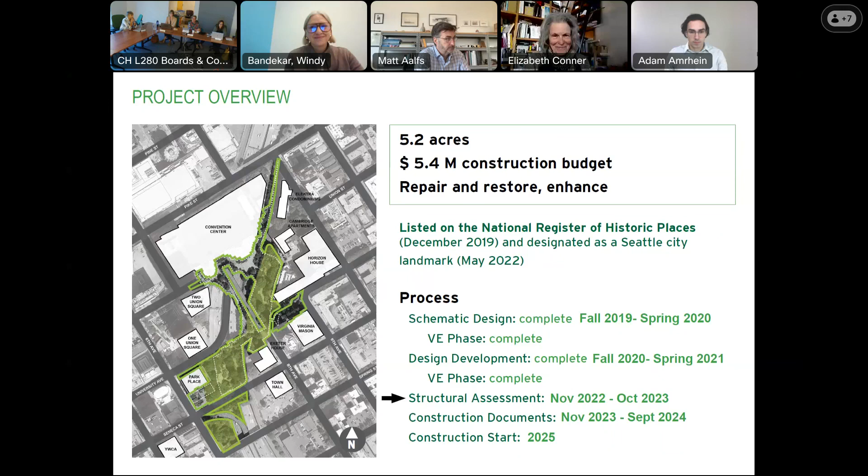The original intent of the project was to make the park more welcoming, bring people back to the park, and restore its reputation as a centerpiece of Seattle's park system and an icon of landscape architecture.

Through the design process, the design team teased out key recommendations to strengthen the park entrances, clarify and promote the park's prime areas, and increase activity throughout the park to attract families and park visitors, providing infrastructure that would support events and activities.

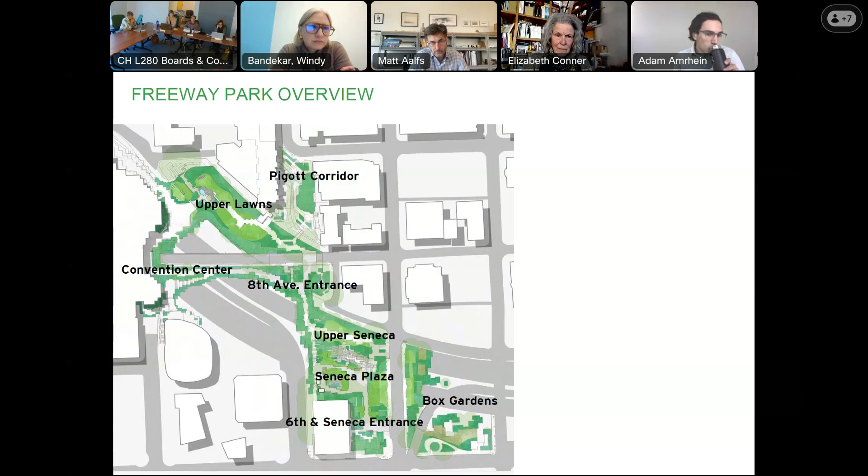So Freeway Park is a complicated system of properties. There's a central spine that is publicly owned, and then the Pigott Corridor, the Convention Center, and a little piece down at the bottom at 6th and Seneca entrance are actually privately owned parcels that act as arms out to the community connecting up to Freeway Park.

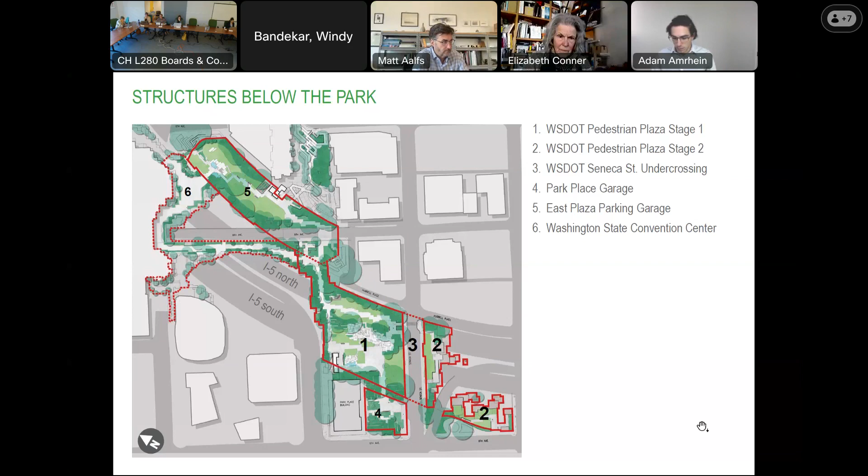Under the park there's a series of structures. Areas 1, 2, and 3 are over the WSDOT lid, which is over I-5. Parcel 4 is above the Park Place garage, under the Park Place building. Area 5 is the City of Seattle East Plaza parking garage, and area 6 is the Washington State Convention Center. So there are a lot of different structures that this park bridges over.

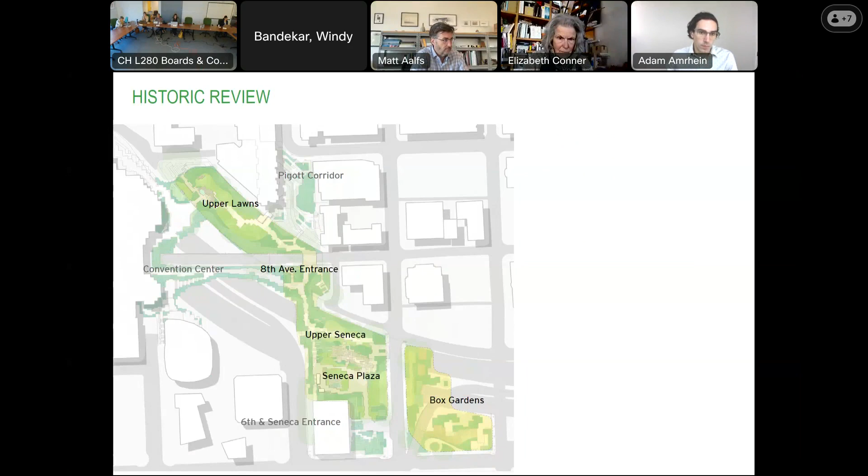Primarily, this central spine is subject to the landmarks designation, so it's also under historic review, and this is where the majority of our improvements are taking place.

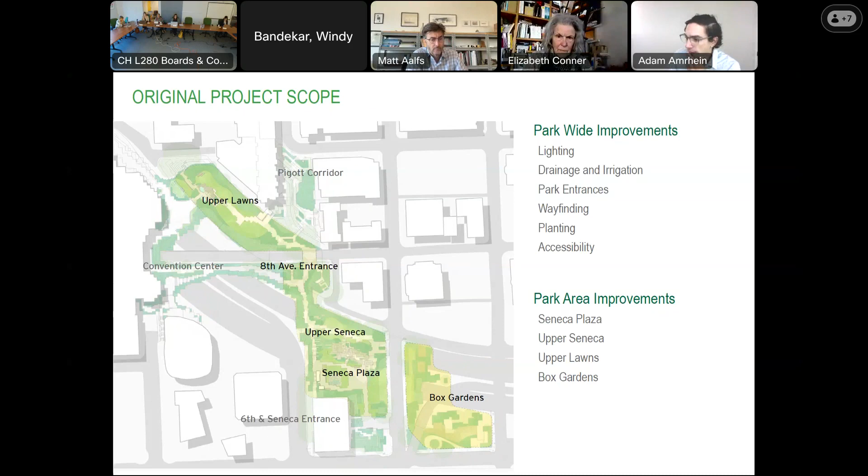The original project scope stretched from the upper lawns all the way down to the box gardens. That original scope came in at $23 million, slightly over our $5.4 million mark, so we have had to tease that back.

With the help of several advisory groups and meetings, we came up with this phase 1 core of improvements, which really focuses on the upper Seneca Plaza and the restroom building in the upper lawns, as well as some signage, wayfinding, and lighting that goes throughout that whole spine.

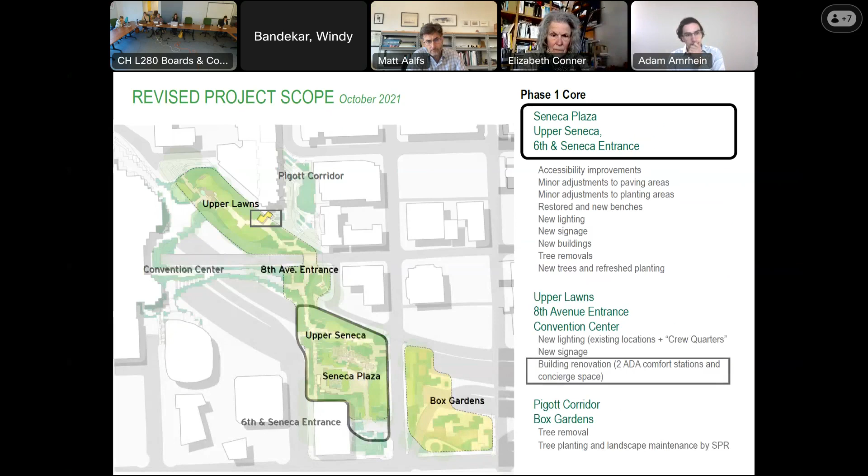Jumping into the landmarks controls and incentives: the Landmarks Board has a certificate of approval that we will need for any alterations or significant changes to the built features, major modifications to landscape, hardscape, and the original lighting of the park.

Just want to note that landmark designation does not impede the expansion of the park in the future. There's been some concern that any sort of expansion over I-5 in the future would be impeded by landmarks designation, but it does not.

We can also get a certificate of approval through administrative review for additions to building features such as ducts, wiring, conduits, exterior light fixtures, and security system equipment, removal of trees identified as dead or hazardous, graffiti abatement, and wayfinding signage.

We do not need a certificate of approval for repairs, maintenance, pruning of trees, or alterations to planting areas that are consistent with a board-approved vegetation management plan.

Let me step back on that. The design team, as part of this project, will create a vegetation management plan that will get approved by the Landmarks Board. After that approval, any improvements or alterations to planting areas must be consistent with that board-approved management plan, but we do not need to go back to get a certificate of approval for that in the future.

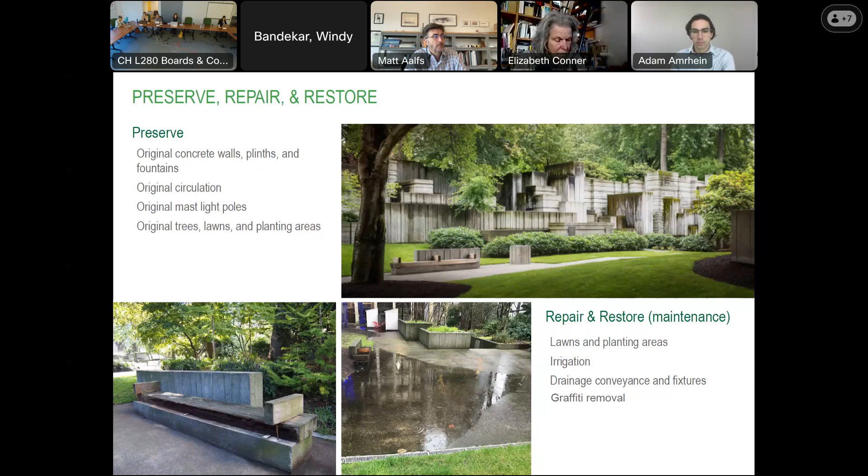We're also chipping away at that deferred maintenance that I talked about, that $23 million, so we'll be working through that. The enhancement elements that are part of the project are as stated before and as listed here.

We are also modifying some of the original elements, the original paving. We're expanding, which you'll see in a second. Some of the lawns and planting areas will be aligned to respond to these enhancements of the paving.

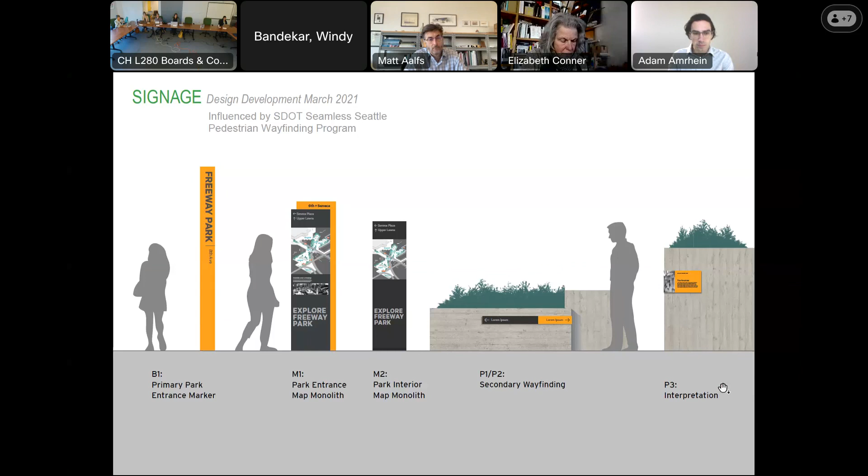We also are proposing a signage package, and this again comes from our design development package that we showed in March of 2021. The signage was influenced by the SDOT Seamless Seattle Pedestrian Wayfinding Program. So we're wanting to be consistent with the signage within Freeway Park, so pedestrians can flow from the core of the city through the park and have consistent wayfinding vocabulary.

Lighting will be enhanced in three ways. The pedestrian light poles, which were not original but were added later, we will retrofit these with new LED fixtures.

There are two tall original pole lights or mast lights that the original design intent of Freeway Park was to be downlit and give a moonlight effect through the trees, which has been hindered by the overgrowth of the trees and canopy, and also by the fact that these lights aren't working anymore. So we're getting up there and repairing those.

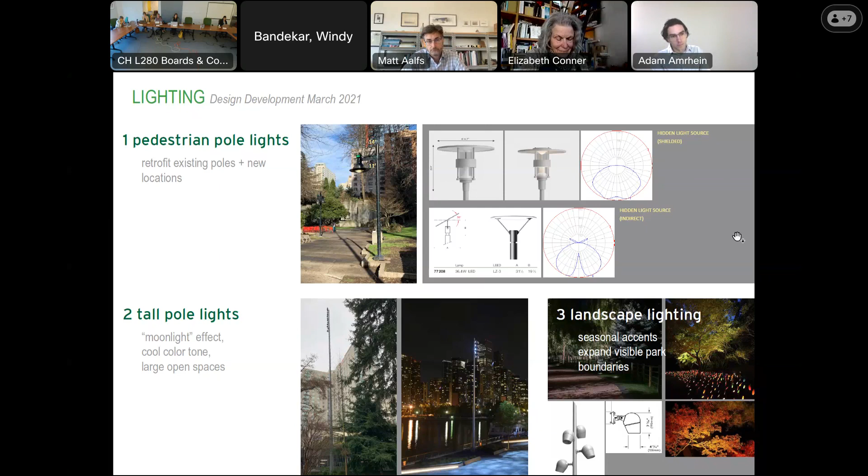And then also just accent lighting in the landscape.

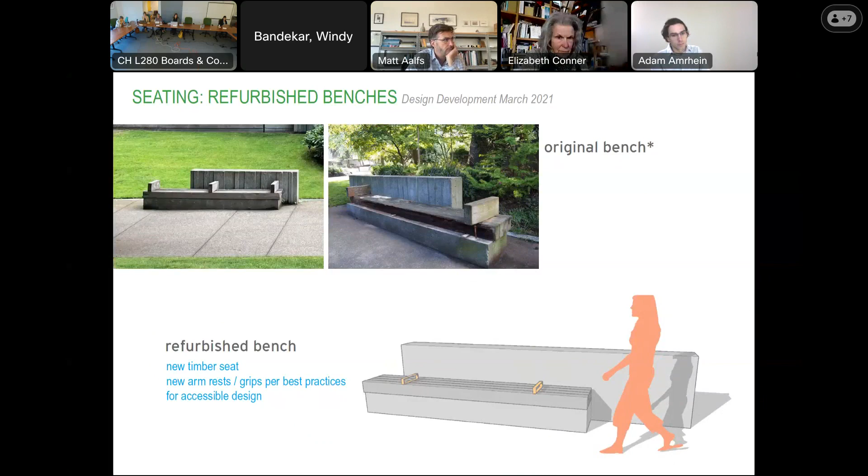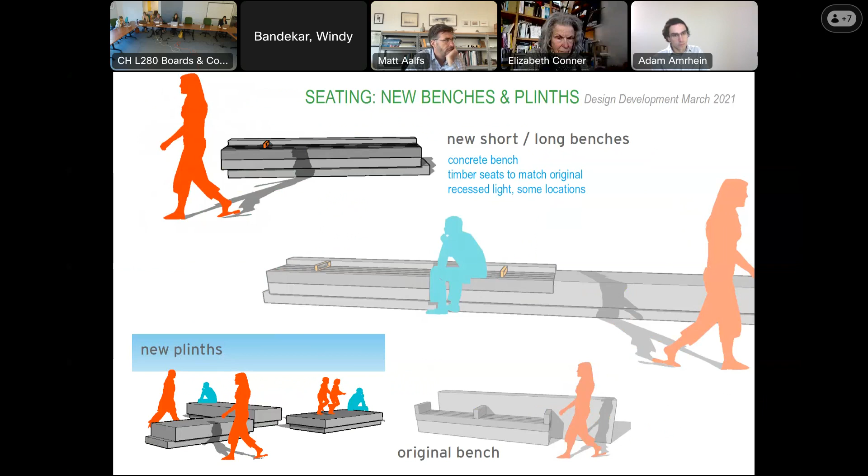We're refurbishing the existing benches and adding armrests and grips per best practices for accessible design. And we are adding new benches in discrete areas that are reminiscent of the original bench to add more seating within the plazas.

As I stated, the trees have done very well out there, better than anyone had ever expected, and you can kind of feel that when you're out there. So the design team has developed a canopy management plan where we will be trimming back some of the trees.

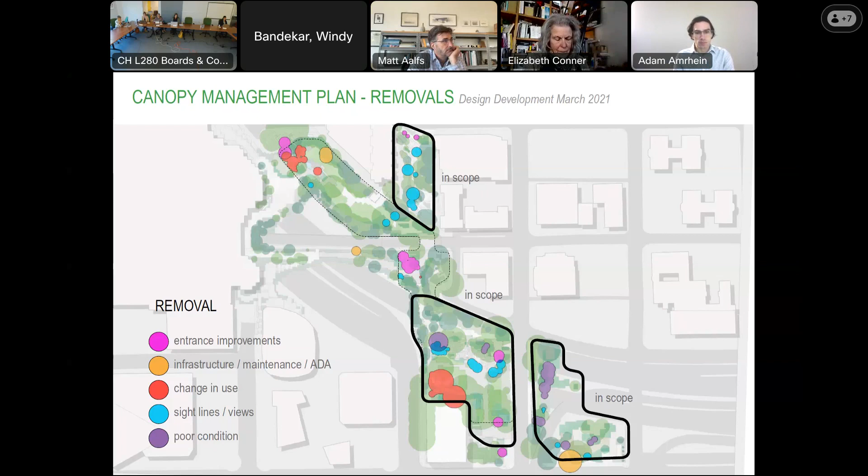Removing some of the dead trees or trees that are in poor condition, and also removing some that are the wrong tree for the wrong place. And as we change the use of a location, we'll be removing those trees as well.

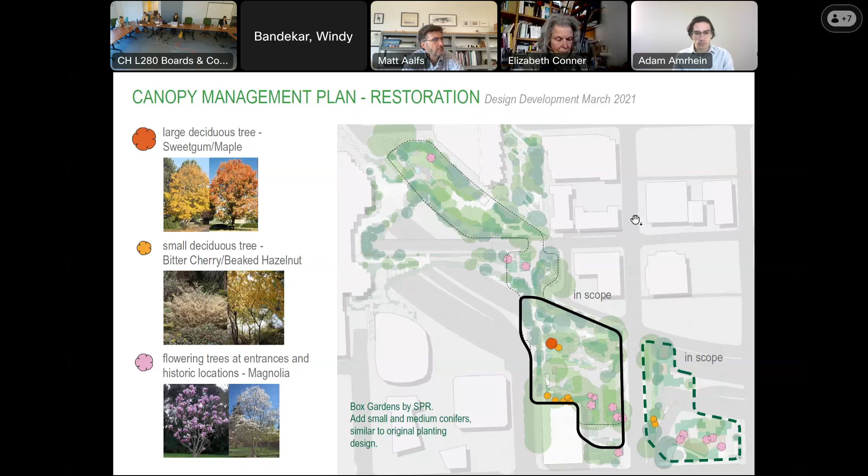We have a plan to restore some of the vegetation, particularly the trees, as shown here. And we're choosing a little bit smaller trees that will maintain their scale in relationship to the park.

Again, doing some pavement, repavement for ADA and drainage repairs.

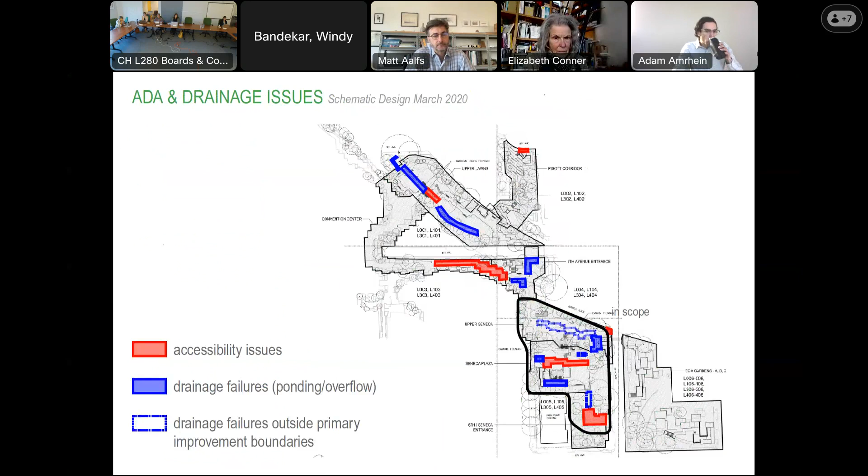So now looking specifically at these places within the park, starting at Seneca Plaza. We are increasing the plaza and adding two new buildings, a concierge restroom building and a storage building. Adding new seating around the edges of this extended plaza.

Improving circulation down through the canyon so you don't have to walk all the way around, you can cut right through to the new larger plaza. And also elevating a depressed vegetation or planting bed, which tends to be a bit of a security issue. We're increasing the height of that vegetation plane and creating a new raised lawn and viewing area.

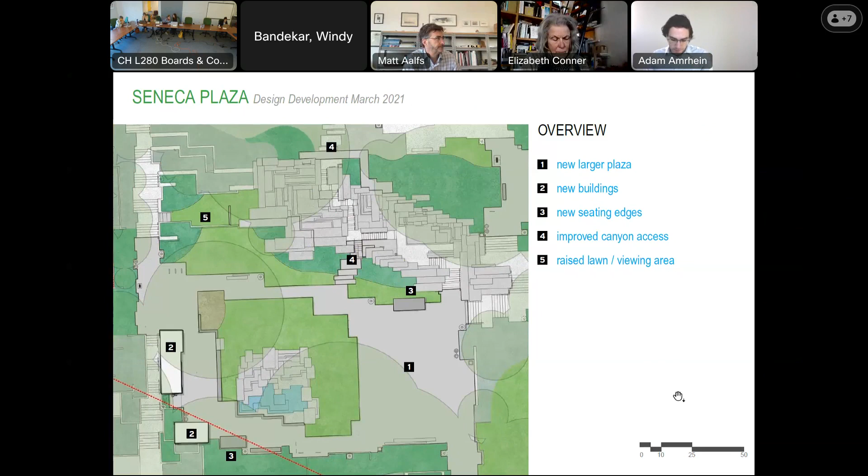None of that has really changed since the March 2021 presentation. And here you can see those new buildings in the back.

This is that Seneca and 6th entrance. That's the Park Plaza building right there. And so this work straddles the public property and the private property, but we're making improvements on both to be consistent with the intent of the entrance of the park.

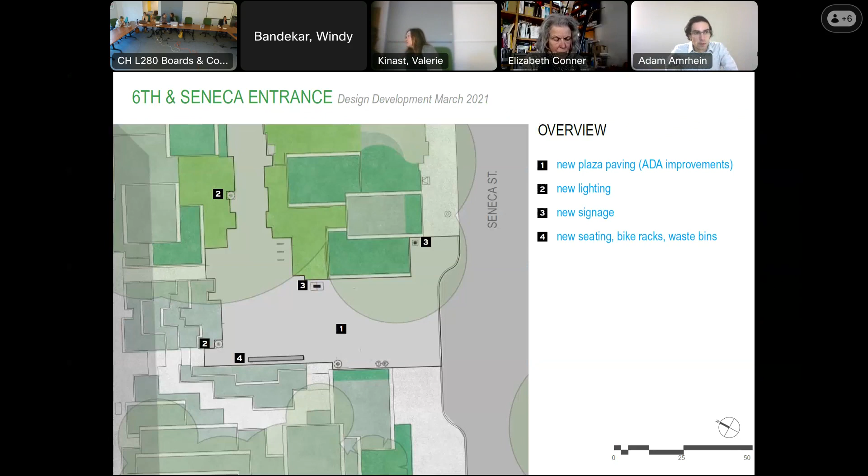So extending the plaza, increasing or changing the pavement to have the right grades for ADA accessibility, new lighting, new signage, new seating, bike racks, and site furnishings.

Previously in the design development presentation, we had also proposed work in the right-of-way. We are not doing that work now.

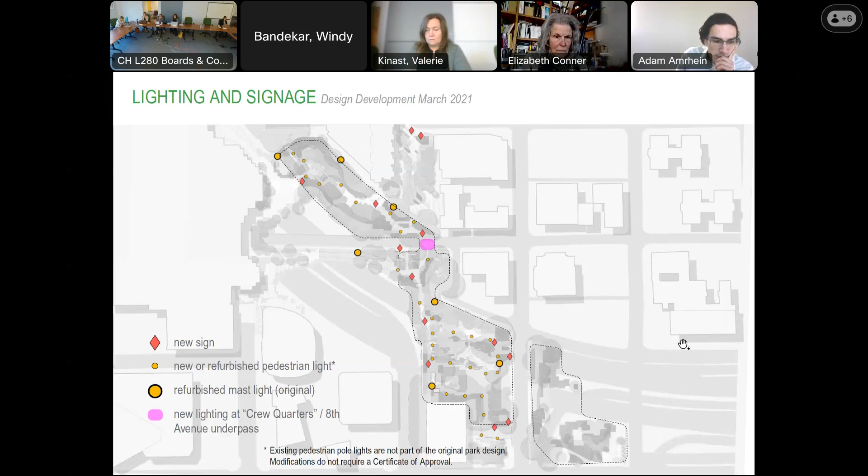Outside of that main core, as I stated earlier: wayfinding, lighting, new lights under the overpass at the crew quarters at the 8th Avenue underpass, and improvements to the restroom building, adding a concierge space.

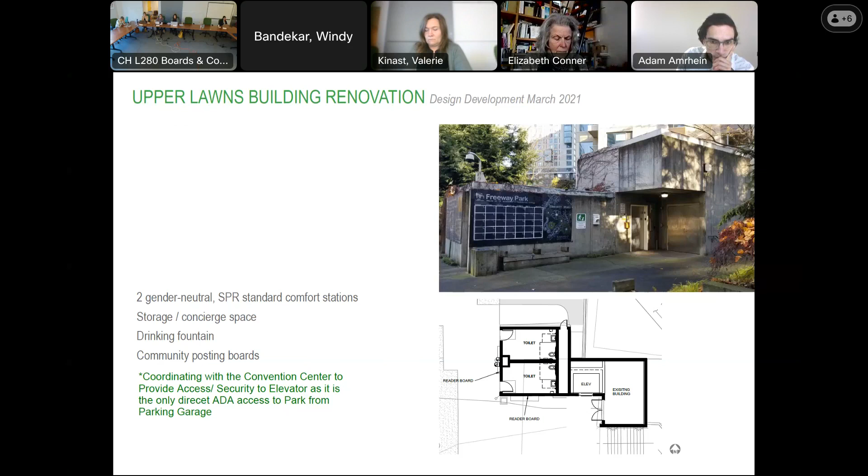Since March 2021, we've been discussing with the convention center this elevator, which is the only access from the parking garage up to the park, the only ADA access to the park. It is currently shut down, so we are trying to coordinate with them to improve security and open that up.

As of Tuesday, we just finished up this WashDOT structural analysis and review. It took a little over a year to get that completed. Through that discussion, we were working with WashDOT to understand how we were going to calculate the real loads and what the threshold would be for this bridge element.

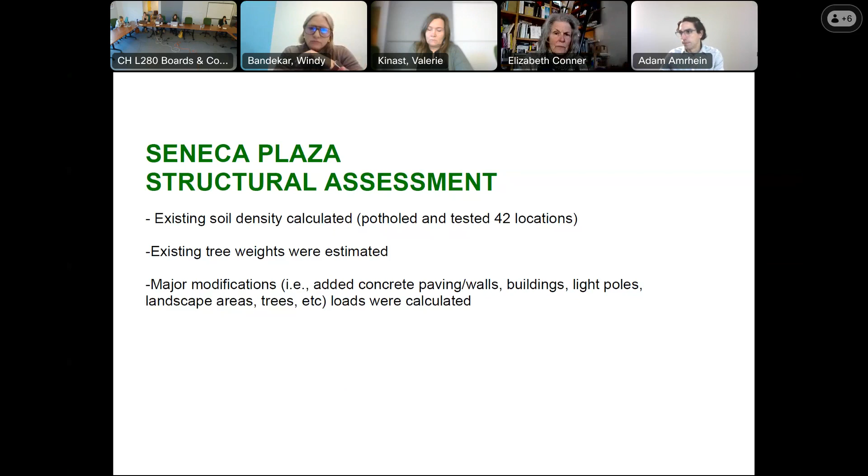So we potholed and tested 42 locations throughout the site to get the existing soil density, finding that there's about 3 feet of sand under the soil. We estimated the existing tree weights and also calculated the proposed major modifications in our improvement plan.

These hatched areas are the locations where we did that structural analysis. What we found was a significant number of these locations were actually exceeding the real load weights that were the threshold for the bridge.

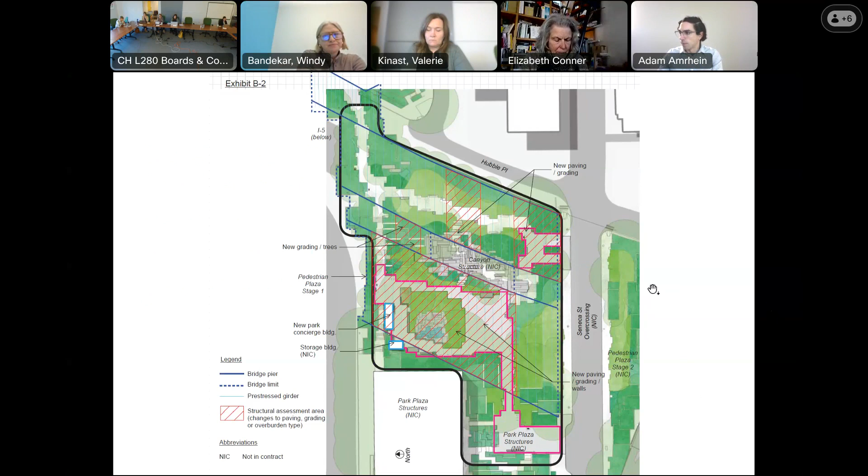So our design team went back to the drawing board and tried to figure out how to lessen the load on this. Not only were our modifications a little too heavy, but also the existing conditions were heavy due to thicker soil, bigger trees, trees planted in locations they shouldn't have been planted, and additional trees planted over the years that didn't take into account the structural loading.

So the design team has proposed 4 load reduction strategies. First, we are going into all the areas where we are making modifications, taking out all of the sand and replacing that with structural foam under all of the pavement and lawn areas that we are modifying.

Second, we are removing soil and sand around the tree roots through air spading and washing out, and backfilling with this lightweight foamed glass aggregate. It's actually a new product, and as far as we understand, it hasn't been used here in Seattle, but it's being used elsewhere on the West Coast with really great results. So we're excited to test that out and be able to retain these trees.

Otherwise, we would have had to just remove these trees and replant something else. So we're excited about that.

Tree pruning where we can, to reduce weight. At some locations, the trees are just too big, so we will have to take a few trees down to the root ball and plant an augment plant around them.

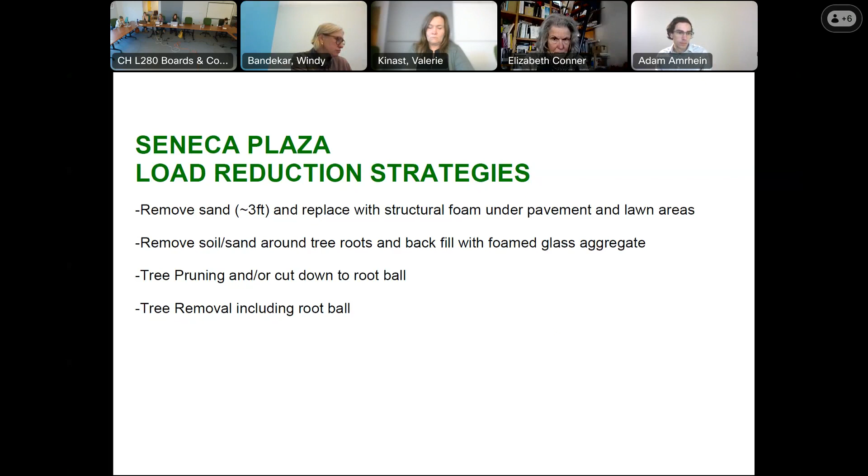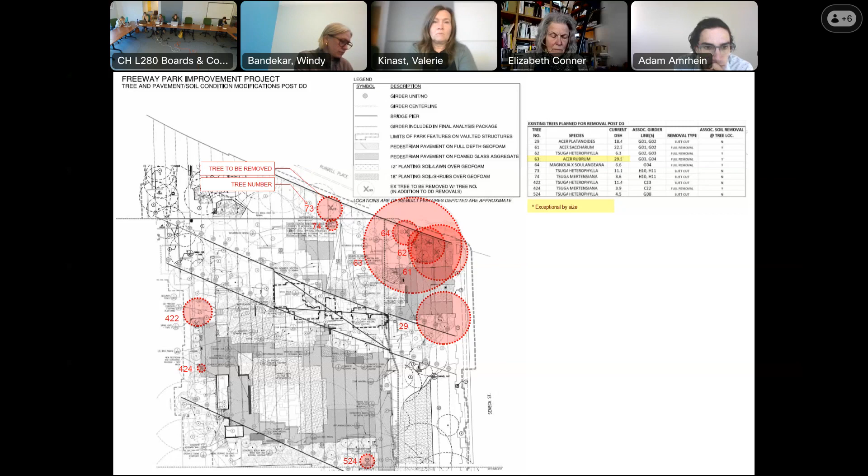You can see in the very top upper right, the design team is looking at replanting with smaller trees that still frame the entrance and give a presence at that corner while staying within the load threshold.

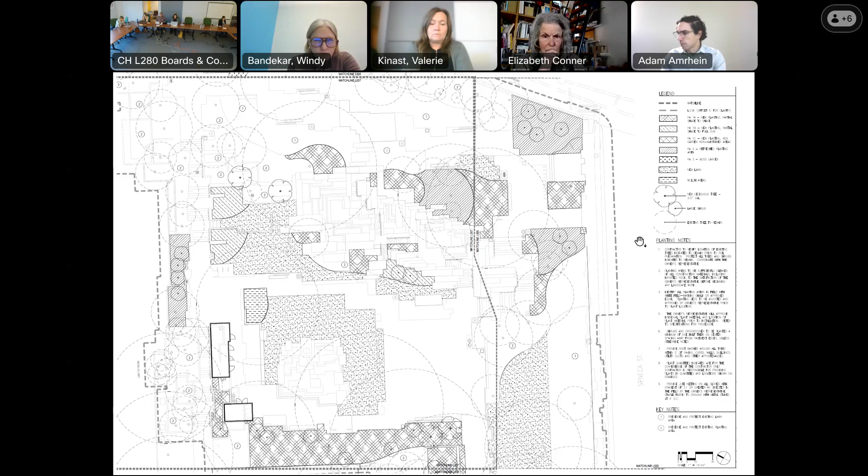So the next steps for us on this project: WashDOT has accepted our calculation and our strategies, so they have allowed us to go forward into construction documentation.

They also are saying that the old lease—WashDOT is going through all these joint properties and renewing leases, and this lease that was kind of created back in the 70s needs to be redone. So we're working through that, which is not a quick process. We will be diligently going through that process for probably the next year and a half.

But more recently, we will be flood testing during the fall to evaluate the drainage and then begin construction documentation, really probably next month. Any questions?

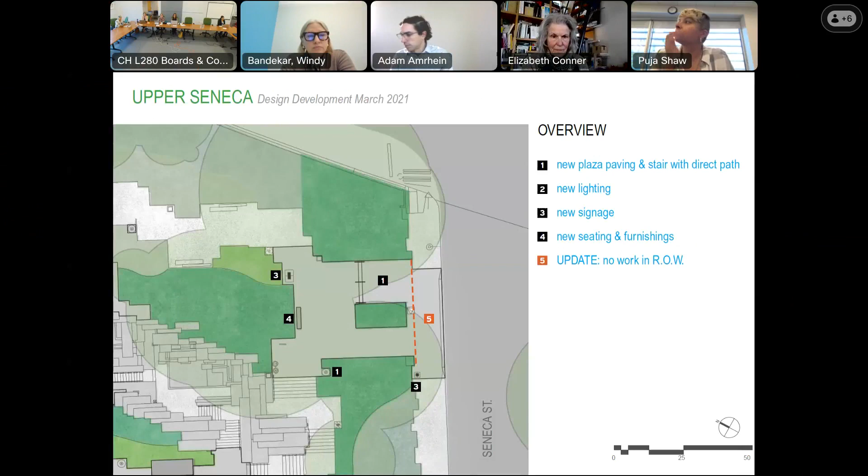So I'm wondering about the philosophy behind this design intent approach, whatever it is, to have them be of the same style and family as the park, or if you're following one of Landmark's strategies, which is to have new stuff be obviously new, not trying to blend in. So I'm just wondering what's going on with the design intent for those things.

Yeah, Calder, would you be able to speak to that? Yeah, I can speak to that. Can you guys hear me okay? Yes. Okay. Definitely they will look new and different from the rest of the park.

That said, we've done a fair amount of work in schematic and design development to size them and develop proportions that feel appropriate for the park. The intent is for them to be off to the side, small, and feel like they belong there, but also clearly to be new.

It's not clear in this image, but due to weight considerations, they will not be concrete or anything that looks original. The original restroom building up in the upper lawns is concrete, and it's a box. These will not be concrete and they will not be boxes.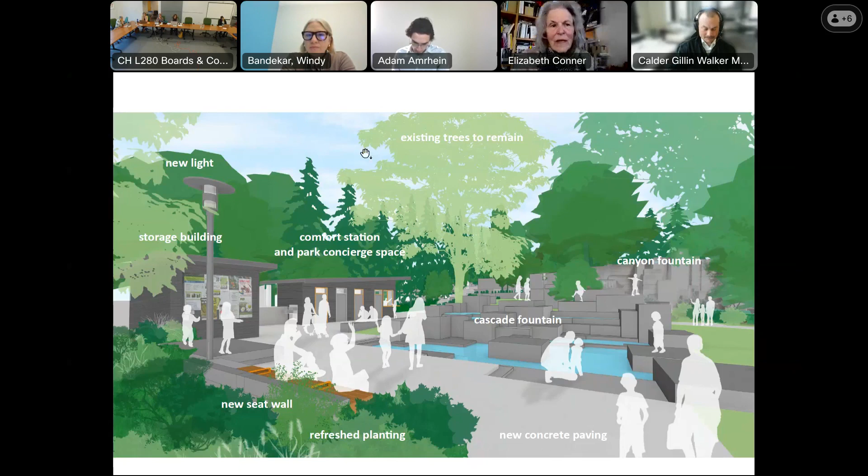Thank you, it's nice to see this again. I may be the only person who's seen this before now, besides staff. So I congratulate you on navigating some of the landmarks questions.

One of the things you mentioned, Reese, is advisory groups. I'm wondering who they are at this point and how long they're going to follow this project forward. We have the Freeway Park Advisory Group, and they will be following this project all the way through construction. And of course the landmarks, and we also have DAHP, the state landmarks group.

Some of the assumptions of how this is going to work, I think, center around programming. You've mentioned some potential public-private partnerships, and you mentioned the convention center, possibly for access questions. Can you talk a little more about what those are? How long, or how many there are, I'm not sure, and how long those will be maintained? Because it seems as though programming and access are really important here.

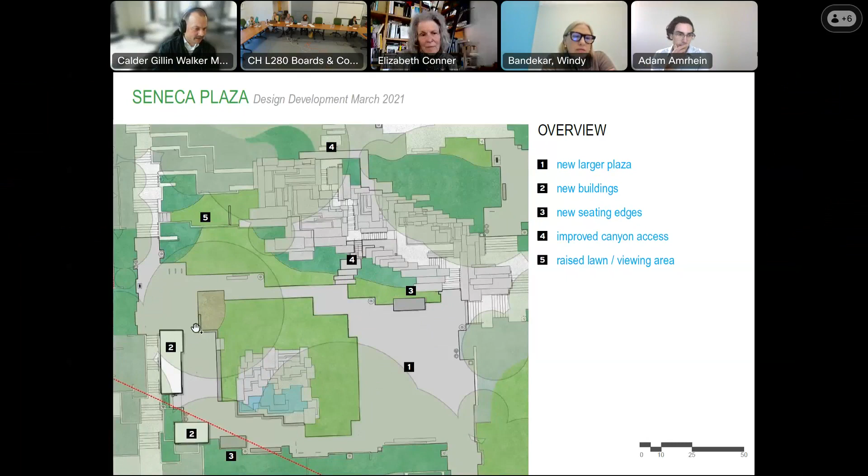No, we've had really good conversations with this group about the location, orientation, and design of the concierge building. For those who are new, it's two gender-neutral single-stall bathrooms and a concierge office space with windows on three sides, right where a stair coming down from above, a stair coming up from the street, and the corner of the plaza meet—currently the darker, less-used part of the plaza. So it's good eyes on the park, and a permanent, comfortable, year-round place for a park concierge, out of the elements—a huge improvement over what's out there today, which is basically a desk that can roll around. That was a key part of the programming and activation of this heart of the park.

Yeah, thanks for the update on that. I'll just finish with one extra comment.

I do think keeping lightness in mind is important, which is somewhat counterintuitive for a large concrete structure that goes over a freeway. If that can continue to inform decisions going forward—that raises a question, since you said the central spine is part of what you need to respect per the landmarks decision: is there anything in the way, as a design team, that you feel prevents achieving that kind of lightness and openness currently?

No, great. I don't think so.

The only tricky part with landmarks is that both buildings are on the footprint of existing planters. Those are elevated planters with walls, so in order to put the buildings where they're shown, we would have to modify or remove parts of those original park elements. That's because it's really the best space, and it's also offset by removing those concrete walls and the soil where the plants are, we can put a building there. So that's something we need to explain and get approval for.

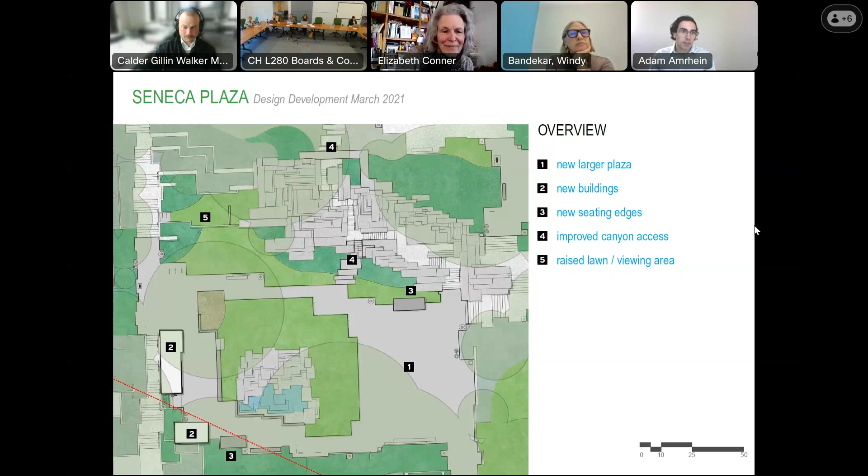Thanks, and I appreciate these partnerships going forward as well, especially where there may be some publicly accessible spaces underneath this as well. I'm going to pass this on to Adam with thanks. Awesome, well thanks team for the presentation. This is really super exciting to see moving forward, and really appreciate the work.

I had a couple of questions. Maybe some of your ADA work covers this, the ADA accessibility work you were mentioning, but could you say more if you've thought about how to accommodate additional modes through the park? I know it's not primarily a through space, but has there been any design features for thinking about how bikes or other wheelie things kind of move through or come to the park?

Calder, are you able to? Yeah.

One thing that comes to mind, and we started this project 4 or 5 years ago so I'm drawing on my memory here, but there was a study. We looked at what it would take to provide an ADA accessible walking connection from the bottom part of the park in Seneca Plaza up, I think it's 14 or 16 feet, to Upper Seneca, in addition to what's out there on the sidewalk on Seneca, which is not under an 8% slope. Basically it was a really long ramp that would completely wipe out the canyon feature, which is absolutely the kind of icon for the park. So with the city's ADA coordinator, we decided not to advance that design any further. I think because of the slope that those two park spaces sit on, it's really challenging, if not impossible, to provide that type of connection. We did look at it, we were interested in it, and ruled it out early in schematic design.